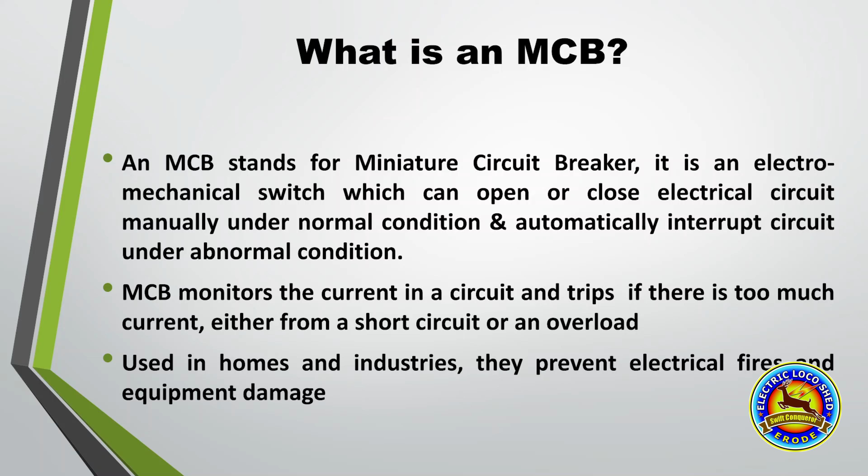It can be opened manually or automatically. MCB monitors the current continuously. It will trip if there is any overcurrent or short circuit. MCB will protect the industrial equipment for fire and safety things.

Previously, instead of MCB, we were using fuses. Why do we go for MCB? Actually, the resettable convenience - it can be reset easily.

A fuse will take some time, and it needs the proper wire gauge to be used to reset it. If the MCB trips, once we identify the fault, we can just attend to the fault and reset

flip the MCB to on, that's it. The MCB is also faster than fuses, and it's easier for troubleshooting.

Normally, the MCBs and fuses are kept in a cubicle in different circuits, so we can easily identify by looking at the MCB box or the panel which part of the circuit

is having a problem - that MCB will be in tripped condition. It's also a safer design - the MCB can be reset by anyone, but the fuse needs an expert, a technical expert, to reset.

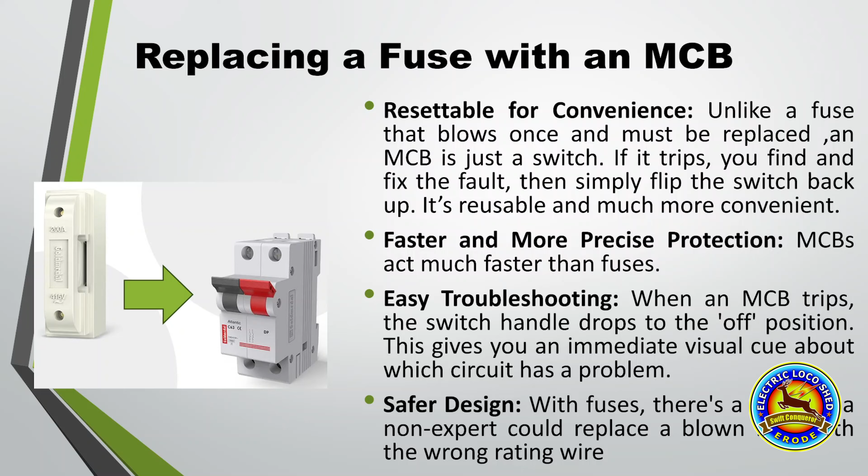The type of MCB that we use in three-phase locomotives, according to the poles: this one is single pole MCB, and this one is three-pole MCB.

Single pole MCB is normally used in single phase supplies like blowers and heaters, and the three-pole MCB we use in motors, compressors, etc.

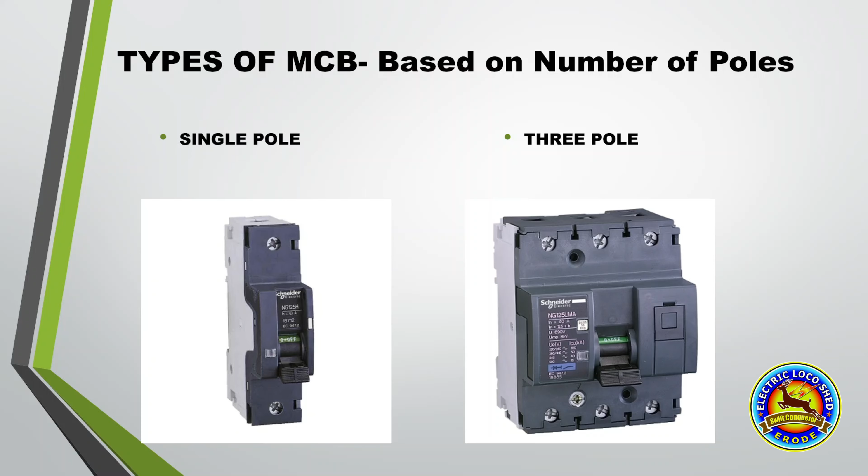Different types of MCBs - according to the characteristics, the MCB is classified as type B, type C, and type D. The type B MCB is purely used for resistive loads, like household wiring and small circuits.

Type C MCB is used for inductive loads. Inductive loads means motors, blowers, etc.

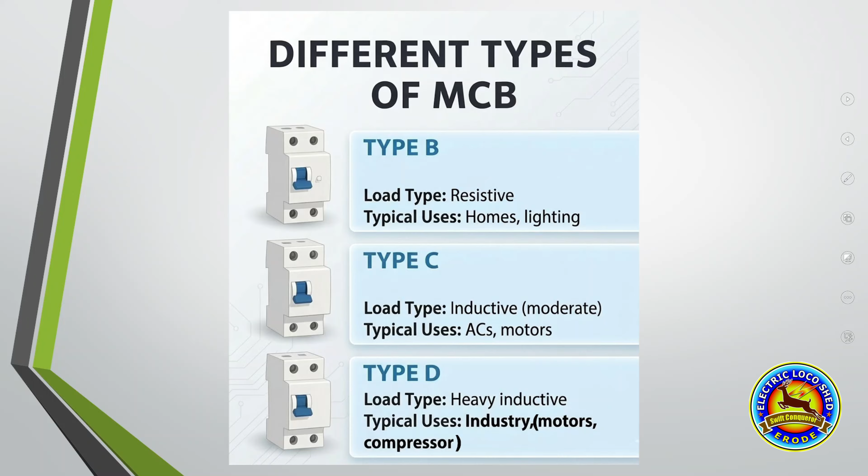Type D MCB we use for inductive loads with a high inrush current - that means compressors, X-ray machines, etc.

Circuit breakers provided in the HB1 panel. Actually, we have so many MCBs in HB1 panel and HB2 panel - it's almost the same. Among these MCBs, only the one used for the compressor, 47.1/1, has a D curve MCB, or

type D MCB. All the others are C curve MCB - just for reference, I quote this. All the other MCBs are of C curve. The MCB used in the main compressor is D curve.

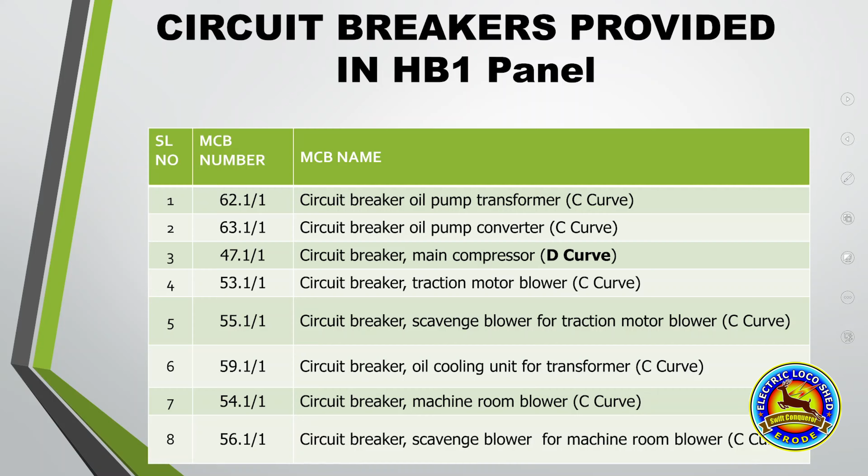This is the internal diagram of an MCB. Here in the top portion, we have a cable terminal. This is the fixed contact, this one is the moving contact. Here is the operating handle. This is a coil assembly.

I will explain the function of the coil assembly later. This is the arc chamber. Actually, the MCB is intended to operate in load condition.

So when the MCB operates under load condition, an arc will be formed. So to extinguish the arc, there is an arc chamber. It is like an arc chute.

This is the mounting rail. This is the cable terminal, top portion and bottom portion. The important portion of this MCB is the bimetallic strip. I will explain it in detail.

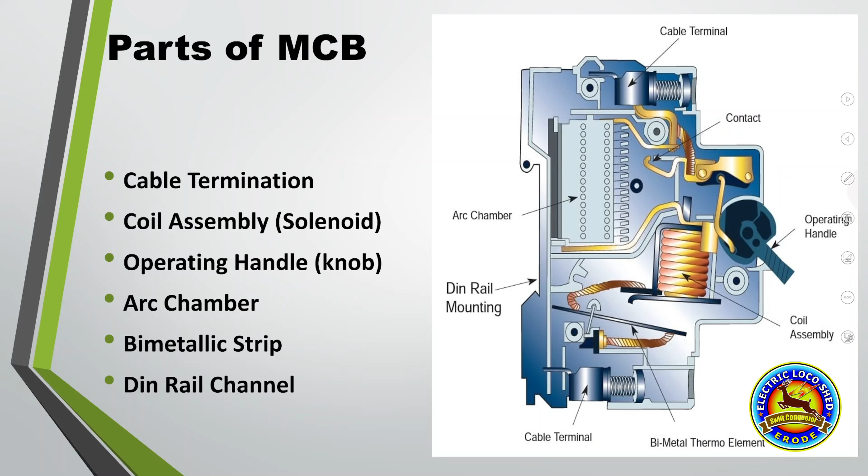Type of MCB tripping - actually, if the MCB trips, there might be two types, two reasons. It will be thermal tripping or magnetic tripping.

It has two mechanisms to trip the MCB. Once the MCB gets tripped, it may be due to thermal tripping or magnetic tripping. We will go into detail.

What is thermal tripping? Actually, for thermal tripping, the MCB provides thermal tripping. The MCB will trip due to overload. Overload means if the MCB is intended to operate at 10 amps,

and the load is taking 10 to 12 or 13 amps, it is called overload. It will eventually trip the MCB.

For this, we are using a bimetallic strip inside the MCB. This is the bimetallic strip. Actually, a bimetallic strip is...

this one is the bimetallic strip. Two dissimilar metals are sandwiched one over another. So what happens is, in normal condition at normal current, the MCB will work normally, but if there is

an overcurrent, the current through the MCB passes through this bimetallic strip. Due to the overcurrent, the bimetallic strip gets heated. Since it is made of two dissimilar metals, the expansion of this bimetallic strip will be different.

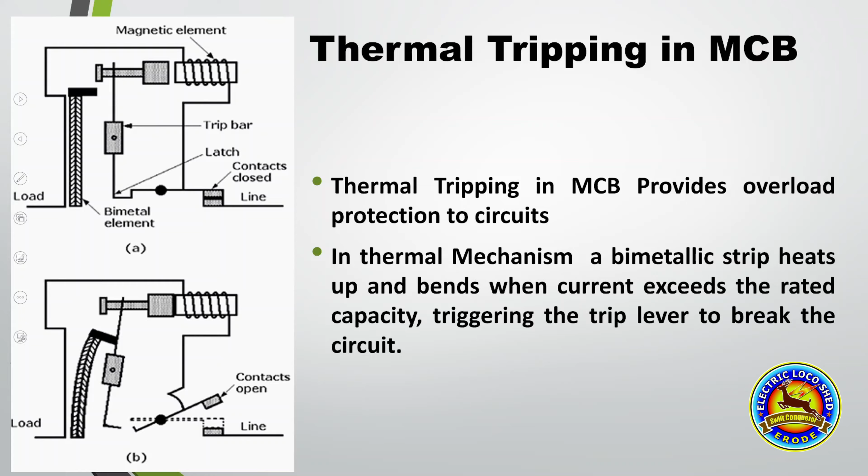This is the animated view of the bimetallic strip, or the thermal tripping mechanism. This is the bimetallic strip - these are two dissimilar metals.

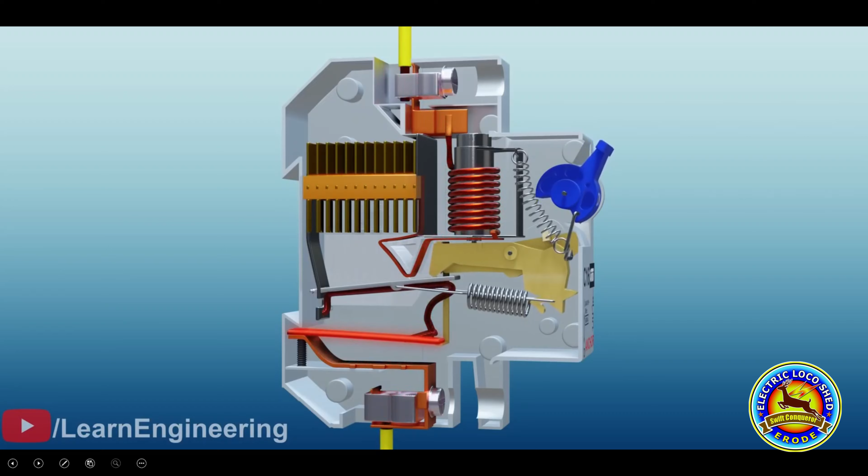At normal condition, this will not get heated up, so normal current is passing through. Once the current is increased, it will generate heat and the bimetallic strip tends to bend. So once it gets bent, it will trigger, and the MCB gets open.

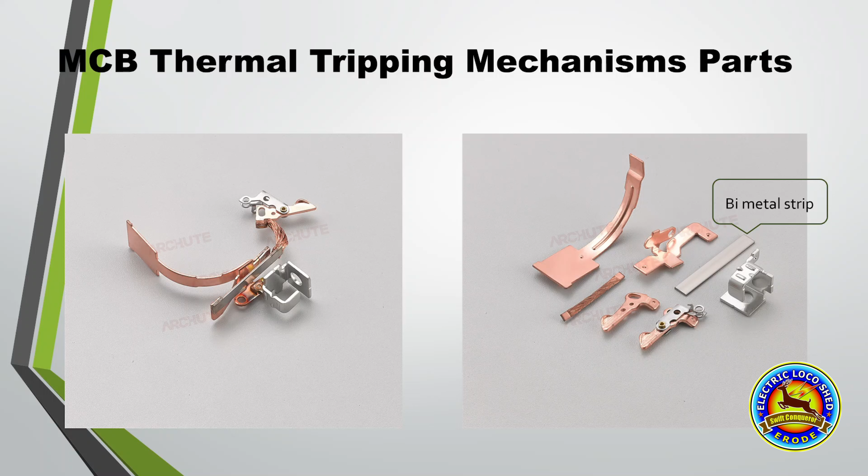This is the internal normal parts inside the MCB for bimetallic strips by the thermal tripping. This is the bimetallic strip, this is the connecting rod, and this one is the casing.

Next thing is magnetic tripping. Magnetic tripping means once the MCB is having a short circuit, for short circuit protection, this magnetic tripping occurs. At that time the MCB will trip at the same instant, so it will trip in 0.1 second to 0.01 second.

So for magnetic tripping, there is an electromagnetic magnet situated in the MCB. In normal time, the magnetic field created by the electromagnet will be less because normal current is flowing. If the current is excess due to short circuit, the magnetic field created by the electromagnet will push the trip rod and the MCB will be tripped.

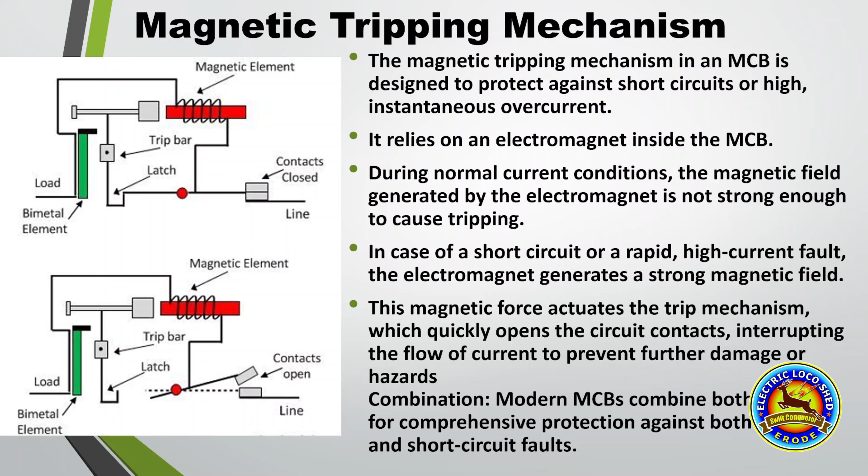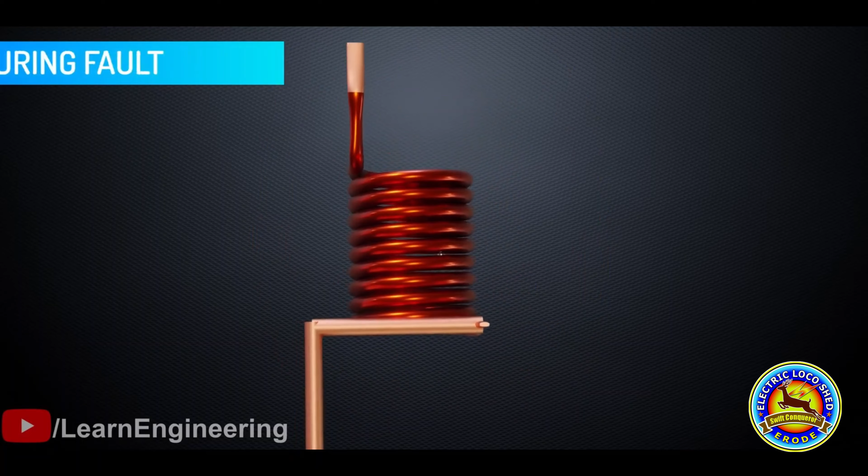This is the electromagnet coil. Inside there is a plunger. At normal current, the magnetic field will be very less, so it will not trip. At high current, the magnetic field created by the electromagnet inside this MCB will be high, so it will eventually pull the tripping mechanism. The thing is that for short circuit, the MCB will trip with no time.

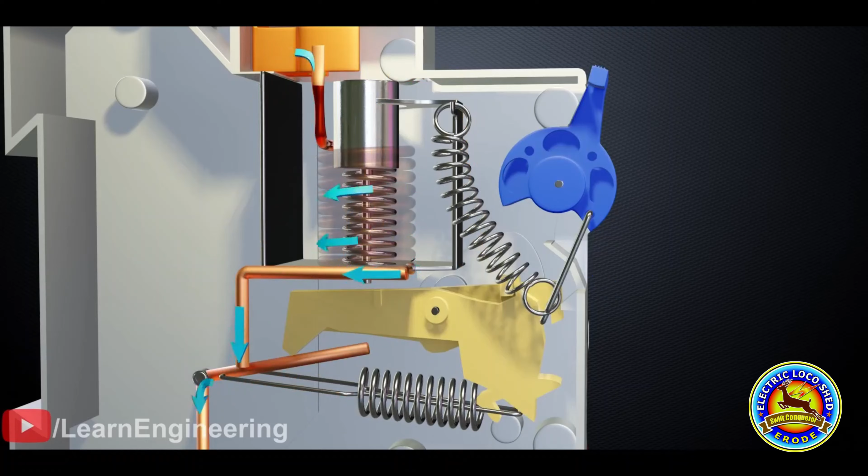This will help prevent short circuit. At normal current it will not trip because the magnetic field created by the electromagnet is directly proportional to the current through the coil.

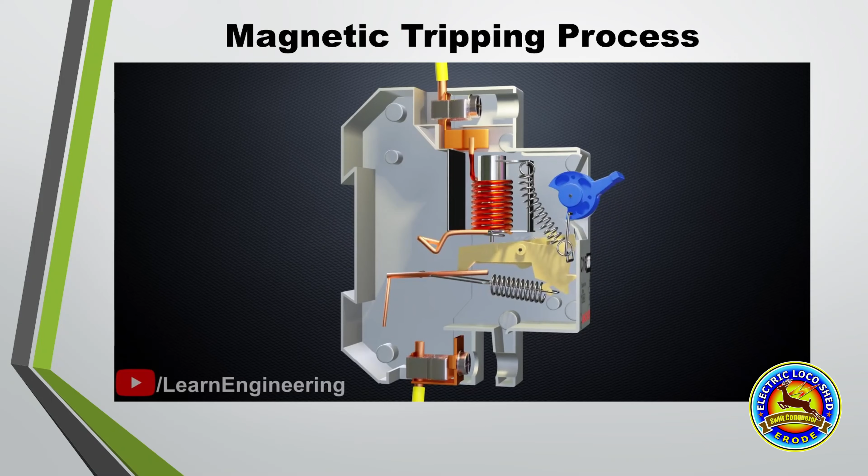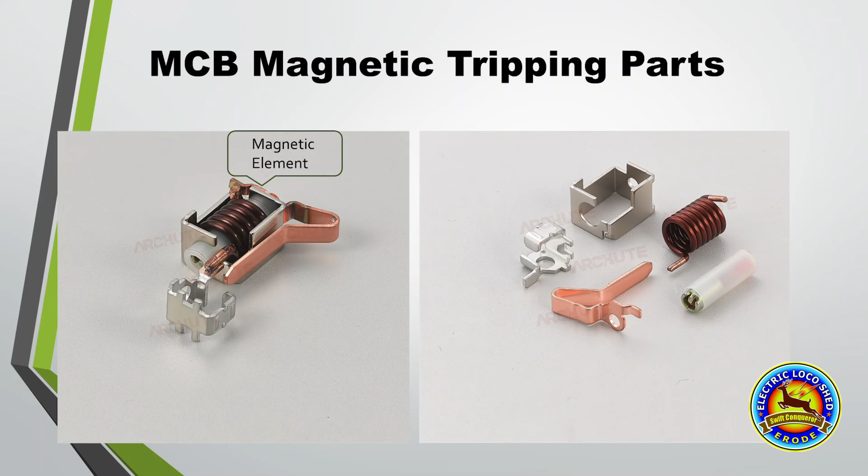This is the parts of magnetic tripping MCB. Actually, the main part is the magnetic element inside. This is a dismantled thing.

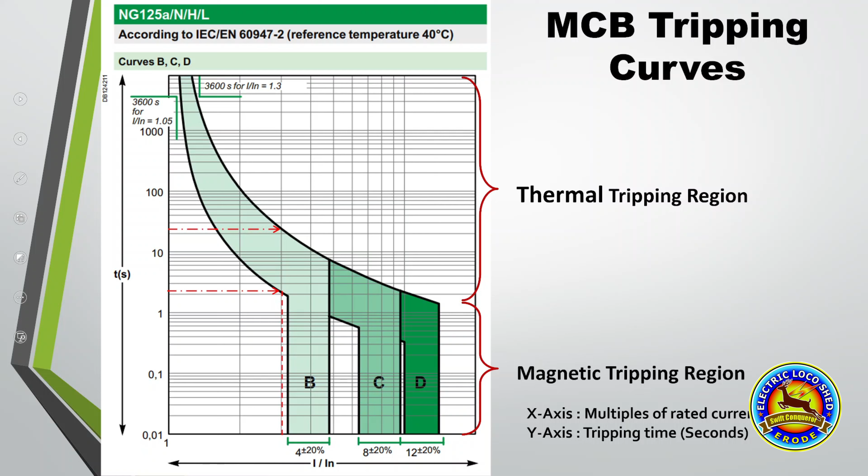IEC tripping characteristics of MCB. We are following 60947 part 2, International Electrotechnical Commission standard, for industrial application. For household application it's 60898. After this 60947 part 2, the thermal tripping time.

We measure both these trippings in the section. Normally, if we apply 1.05 times the normal rated current, I'll explain with an example. If the MCB is having a 100 amp rating, we give a current of approximately 1.05, 5% extra, so 105 amps.

It will not trip within 1 hour. This is one testing procedure we follow. Another one, same 100 amp MCB, we give extra 30 amps, so 130 amps through the MCB. It will trip within 1 hour. These are the tests we do in our section for thermal tripping.

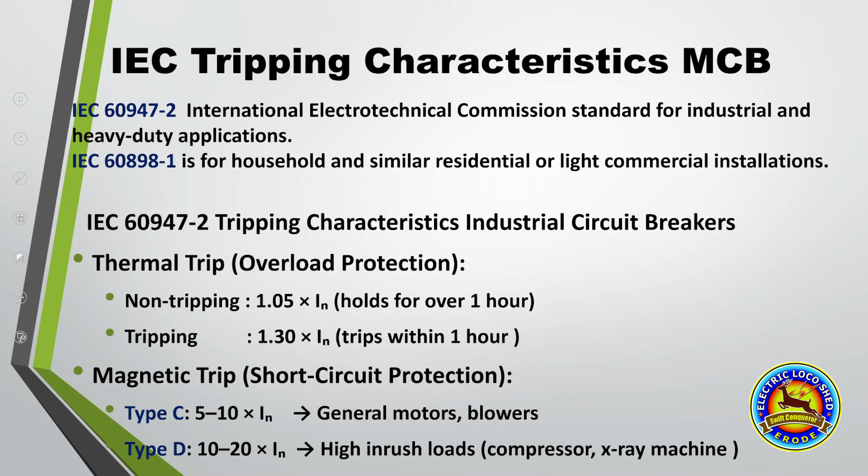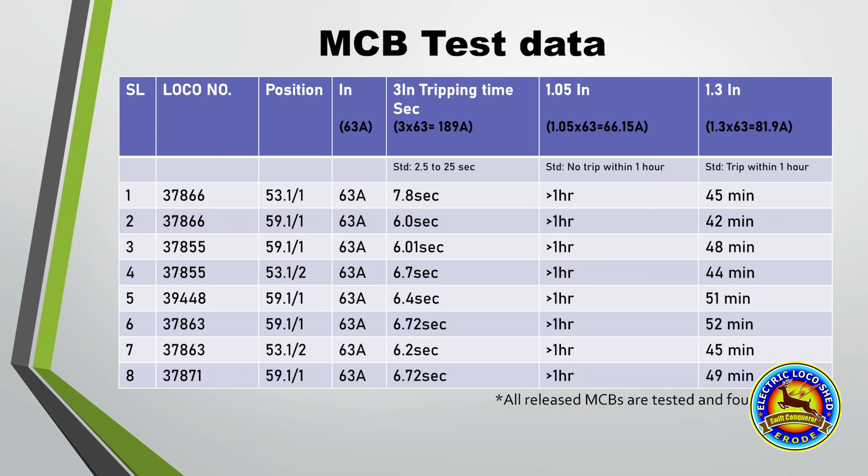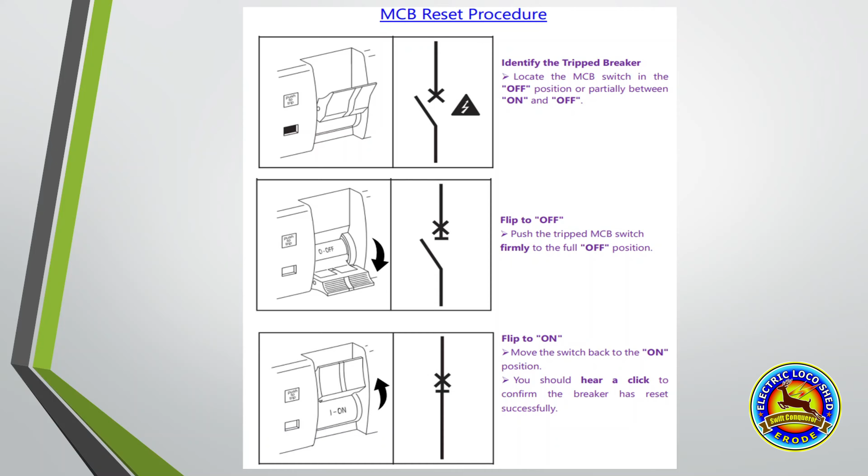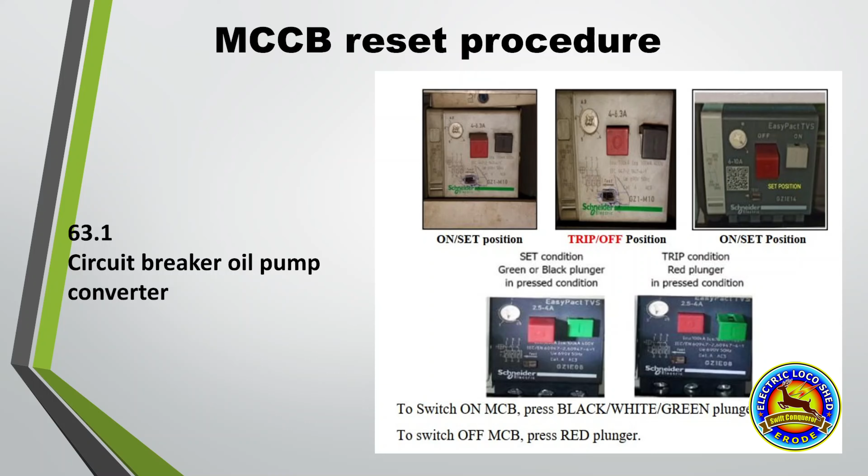Sometimes it is red, black, white, and green. For tripping the MCB, we have to push the plunger, the red button for tripping. We need to use the red button, red plunger. For resetting or turning it on again, we can use either green, white, or black. This is for different types.